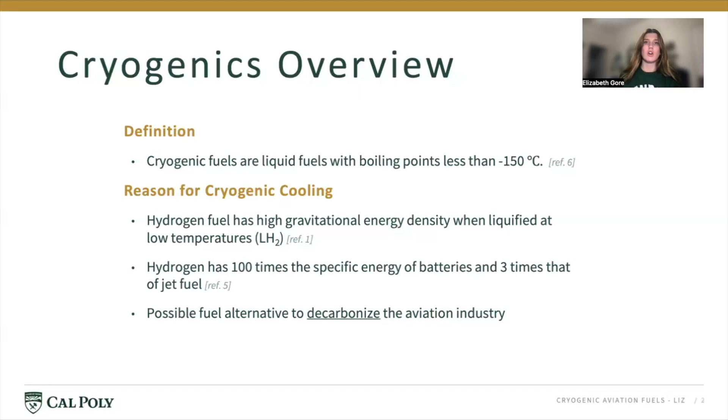Some of the areas where liquid hydrogen is going to need further development to become an aviation fuel are around fuel storage, specifically considerations around storing a super cold liquid at negative 253 degrees inside of a pressurized tank. Also, the propulsion systems are going to need to be rethought, so either combusting the gas directly inside of a turbine or using a fuel cell to power electricity, turning an electric motor and propeller.

And then these two considerations, as well as others, will lead to radical changes in aircraft design in order to accommodate different propulsion systems, fuel tanks, and anything else that goes along with these hydrogen systems.

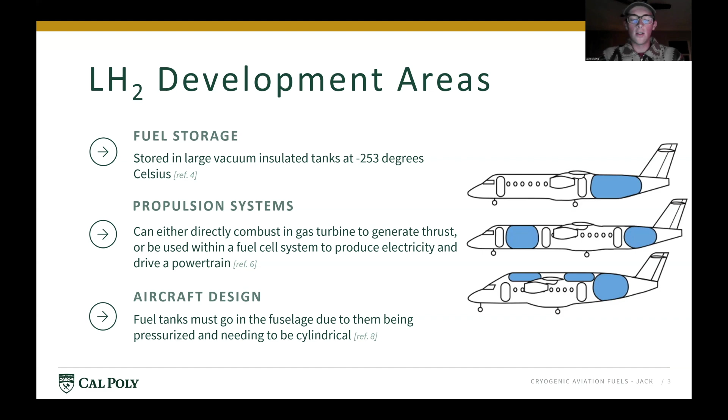The first propulsion system using cryogenic aviation fuels is direct combustion, which follows a similar process as conventional turbofan engines, but uses cryogenic fuels instead, such as liquid hydrogen to combust with oxygen. The byproduct of this chemical reaction is water vapor. Hydrogen can combust across a wide range of fuel-air mixtures, including a lean mixture, which can improve fuel economy. Additionally, its high auto-ignition temperature enables a higher compression ratio, reducing energy loss during combustion.

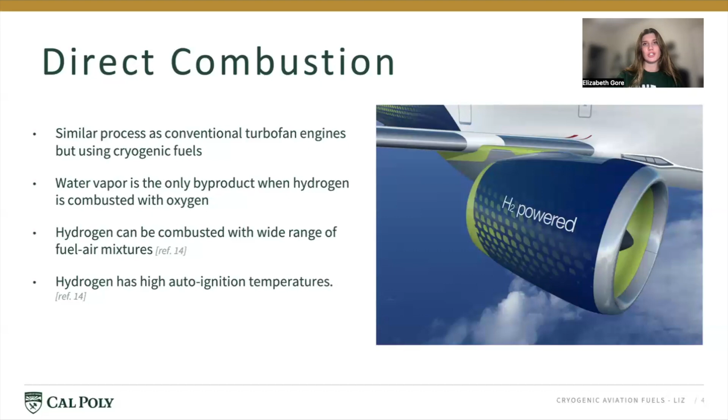The second and more currently viable way that hydrogen is used to power aircraft is inside of a fuel cell. So basically, that is where the hydrogen enters on one side of this cell, and in between the hydrogen and the oxygen on the other side, there is this membrane, the PEM, which is the proton exchange membrane, where the protons of hydrogen pass through and the electrons are split from it, traveling around a wire that then creates an electric current used to drive the engines, the electric motors connected to propellers.

And so this is more prominent currently in aircraft, and a lot of companies already have fuel cells being used because they were developed in other industries first.

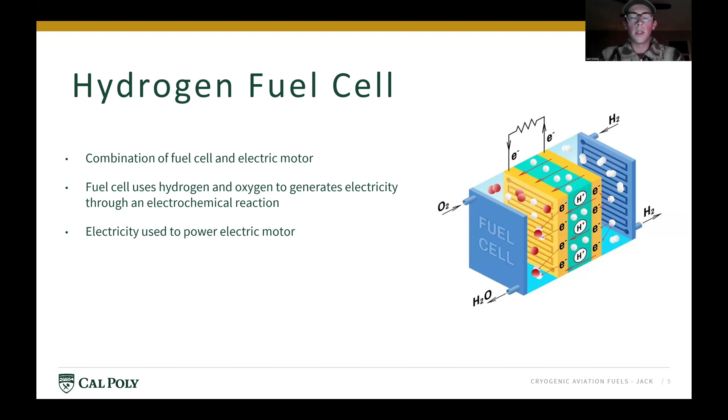Hydrogen electric engines are ideal for transitioning to clean aviation due to their zero emissions and lower fuel and maintenance costs. In 2022, 28% of US greenhouse gas emissions came from the transportation sector, with over 94% of this sector's fuel being petroleum-based, which results in direct carbon emissions. Although aviation accounts for 2 to 3% of global greenhouse emissions, its impact is expected to grow as air travel increases and other sectors decarbonize.

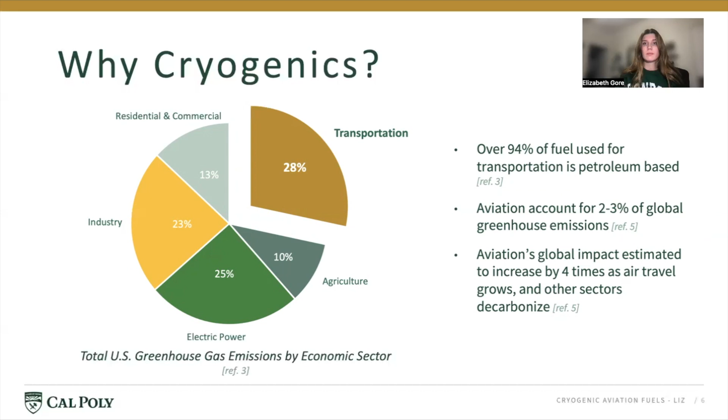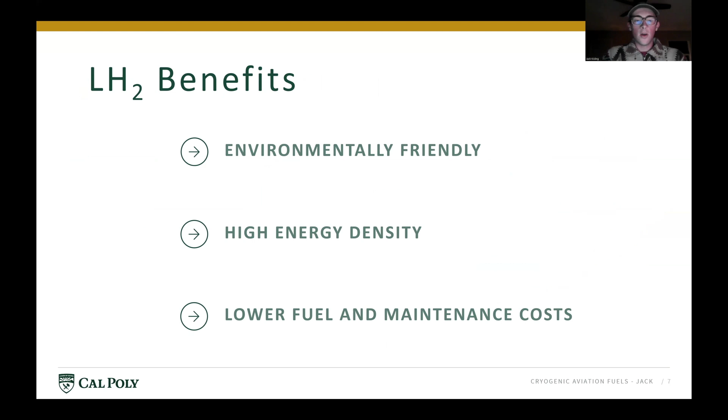Some of the benefits for liquid hydrogen are that hydrogen is environmentally friendly when it's burned, creating only water. It has a high energy density per unit mass, and also hydrogen has lower fuel and maintenance costs associated with it. Hydrogen electric propulsion is critical to achieving net zero carbon emissions by 2050, as outlined in the Aviation Climate Action Plan. Sustainable hydrogen production is another essential aspect of this mission.

Green hydrogen, for example, is created via electrolysis using renewable energy sources. This process can be integrated on-site or near aviation facilities, minimizing emissions from fuel production.

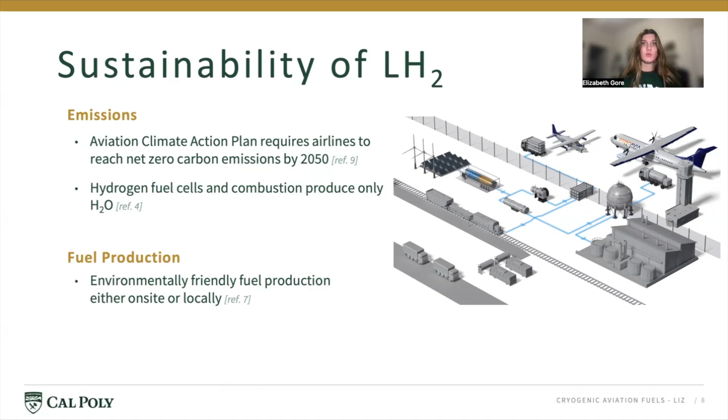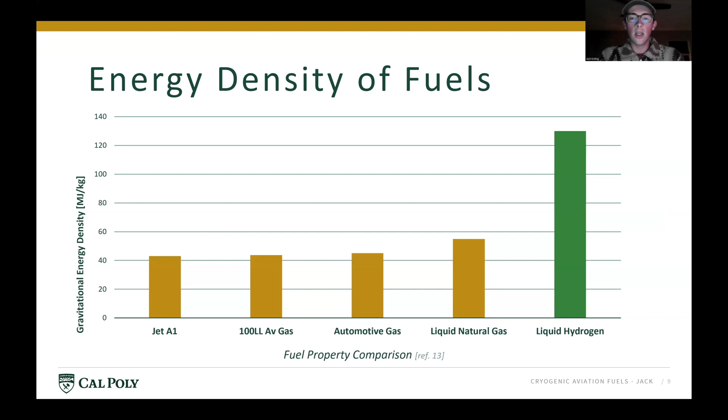Hydrogen is an energy dense fuel in terms of mass. So you can see that hydrogen on the right has nearly 3 times the energy density of traditional carbon fuels like Jet A or aviation gas or automotive gas. Additionally, liquid natural gas is a current fuel that's being researched by the industry. However, it is not as prominent as liquid hydrogen is, and it has a lower energy density than liquid hydrogen.

Liquid hydrogen offers lower operating costs for aerospace applications. It has lower fuel costs than typical jet fuel or sustainable aviation fuels due to its abundance in natural molecules. And as green hydrogen production scales up, costs will continue to decrease. Additionally, hydrogen engines have an estimated 60% reduction in maintenance costs compared to turboprop engines due to having fewer moving parts.

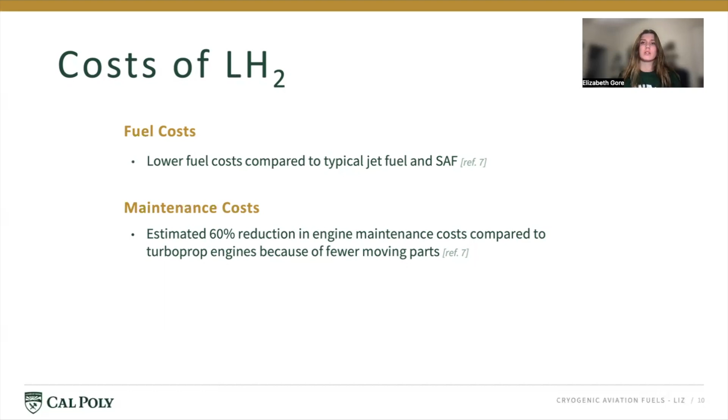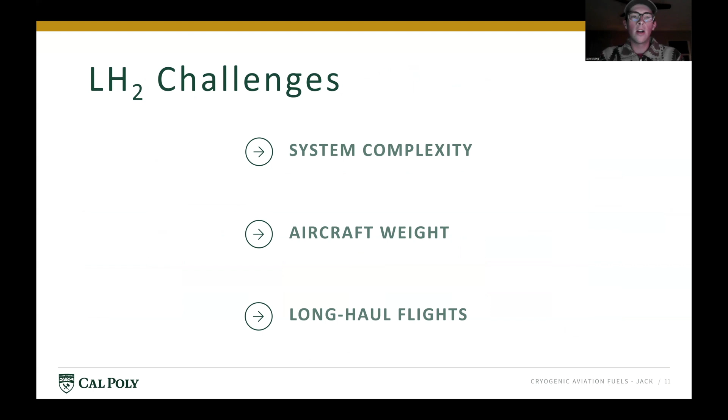Some challenges that are associated with liquid hydrogen are the complexity of systems designed to power aircraft using it. Additionally, aircraft weight will need to increase to accommodate these systems that aren't as fully developed since they are newer. And additionally, long-haul flights are going to be a challenge with liquid hydrogen because it would require a large volume of this hydrogen to power an aircraft for a long distance.

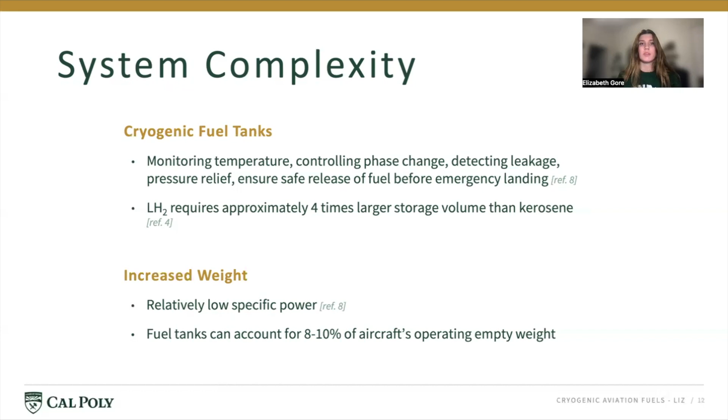Liquid hydrogen presents challenges due to the complexity of cryogenic fuel storage tanks. These tanks must manage temperature, control phase changes, detect leaks, and provide pressure relief systems. This complexity results in tanks requiring 4 times the storage volume of kerosene. They also account for 8 to 10% of an aircraft's operating empty weight.

As I mentioned, long-haul flights will be difficult using liquid hydrogen currently because current aircraft design doesn't have the space to accommodate large amounts of hydrogen. So to accommodate this, aircraft will either need to increase in size overall to store enough liquid hydrogen to power it on a long distance flight, or one other area that is currently being looked at are blended wing body concepts.

So incorporating the wings into the fuselage and not really defining each super firmly, but having one big wing that's also a fuselage in the middle. This would allow more area for passengers and hydrogen fuel cylinders to exist inside of this wider middle section.

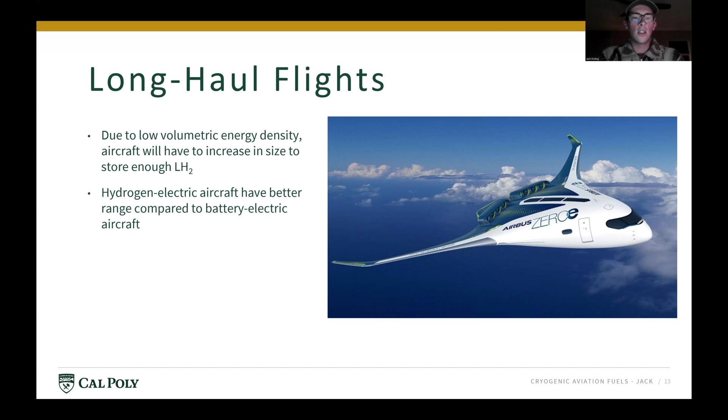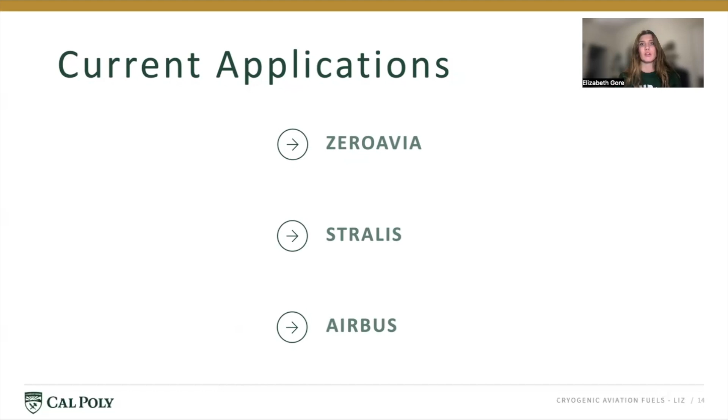Electric aircraft have been looked at using batteries to power aircraft, but this is less energy dense and less viable than hydrogen, which is currently the technology that is almost there to start using for longer distance flights. We have found 3 companies to include in our presentation that are currently testing aircraft powered by cryogenic aviation fuels: ZeroAvia, Stralis, and Airbus.

The first company that is using hydrogen fuel cells to power aircraft is ZeroAvia. They currently fly this Dornier aircraft, which has one hydrogen engine and one typical turboprop engine. So on the right, you can see that is the hydrogen fuel cell engine, and on the left is the regular turboprop engine. That's just for safety because the aircraft will still be able to fly even if the hydrogen engine doesn't work.

However, this aircraft has been very successful and they're hoping to fly one with both hydrogen engines soon. Additionally, ZeroAvia has partnered with Alaska Airlines to produce a larger airliner that will be entirely hydrogen based. That'll be a Dash 8 series, which is an aircraft Alaska currently uses for passenger flights.

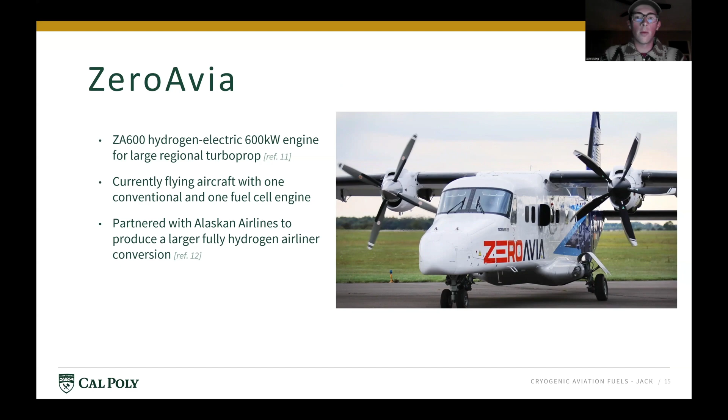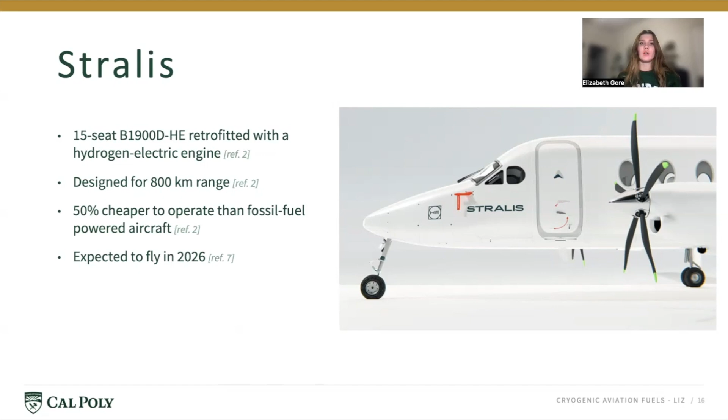Stralis is an Australian-based aviation company developing high-performance, low-cost, emission-free aircraft. Currently, they are retrofitting a 15-seat aircraft with a hydrogen electric engine designed to fly 10 times farther than battery electric alternatives. The aircraft, offering a range of 800 kilometers, is 50% cheaper to operate than fossil fuel-powered planes and is expected to take flight in 2026.

The biggest company that is currently researching hydrogen aircraft is Airbus. So they currently have a fuel cell engine and a cryogenic tank flying on the side of an Airbus A380 jet. This has been really promising for them, and so they are set to have passenger airliners ready by 2035. This is an ambitious milestone, so hopefully they reach it, but that's a pretty near-term goal that is exciting.

Their ZEROe concepts include 3 different aircraft. The first is a turboprop aircraft, which will be for smaller and shorter range flights using a fuel cell. And then they have a turbofan aircraft, which is like a current airliner, but using hydrogen to power the turbofan, which would mean less development of the airframe and more development of the engine.

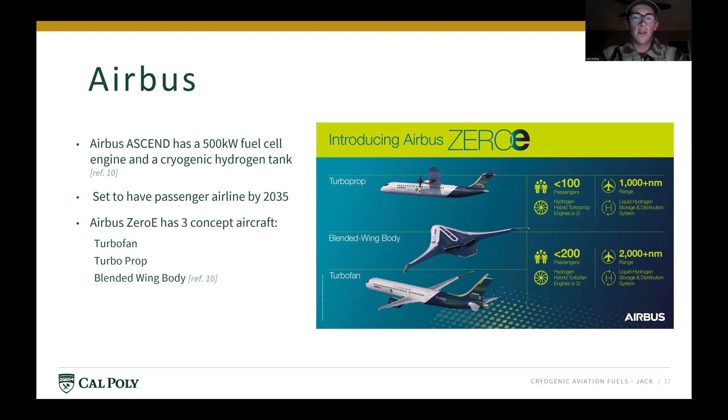And lastly, their future goal is a blended wing body aircraft, which would be an entirely revolutionary fuselage paired with revolutionary hydrogen engines. And that would be the ideal scenario for them, allowing them to carry lots of passengers long distances.